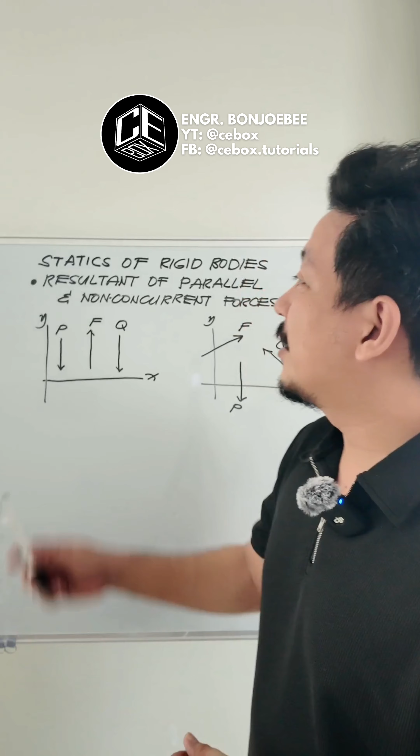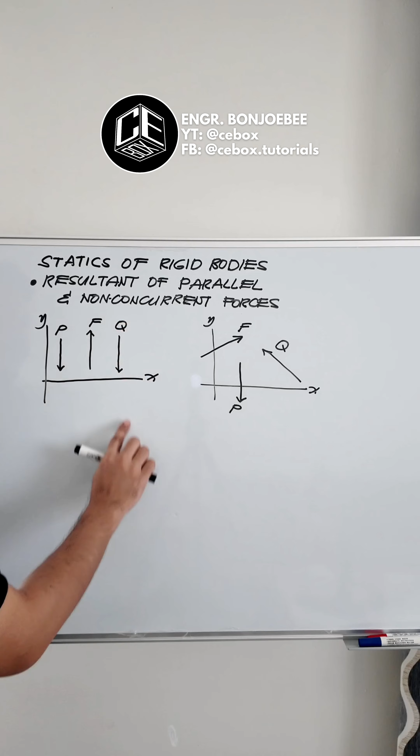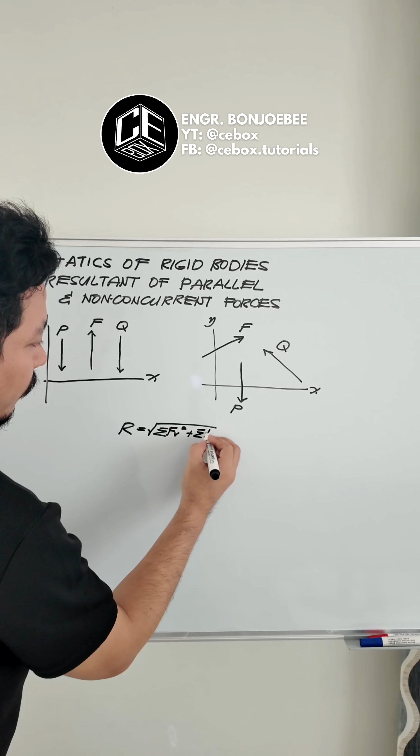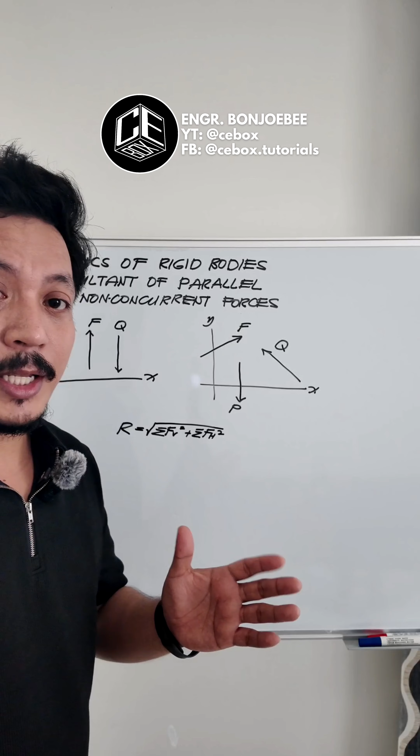Ang resultant natin is R is equivalent to square root of summation of forces vertical squared plus summation of forces horizontal squared. As we can see here in the parallel force system, yung mga forces natin ay pare-parehas na vertical at wala tayong forces na horizontal. Ibig sabihin, yung ating resultant is walang effects in terms of horizontal forces. Kaya ang mangyayari, yung ating summation of forces horizontal is magiging equivalent to 0. Therefore, under ng parallel force system, ang ating resultant is equivalent to square root of summation of forces vertical squared.

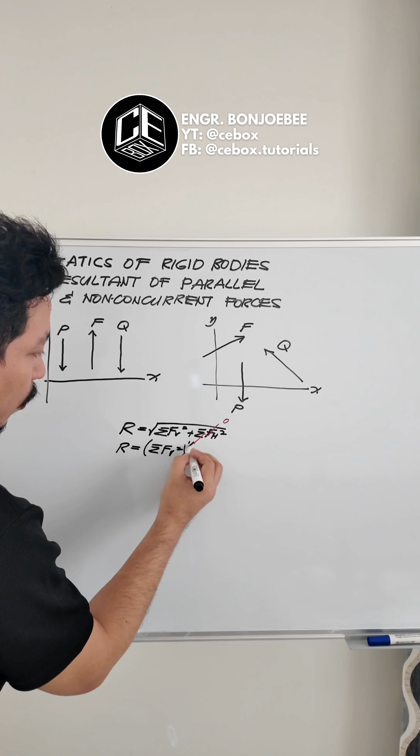At since naka-square root yan, di ba ang square root is what? Raised to 1/2. At 1/2 multiplied by 2 is equivalent to what? 1. Therefore, ang ating resultant under sa parallel force system is equivalent to summation of forces vertical. But, this depends kung ano yung kanyang direction.

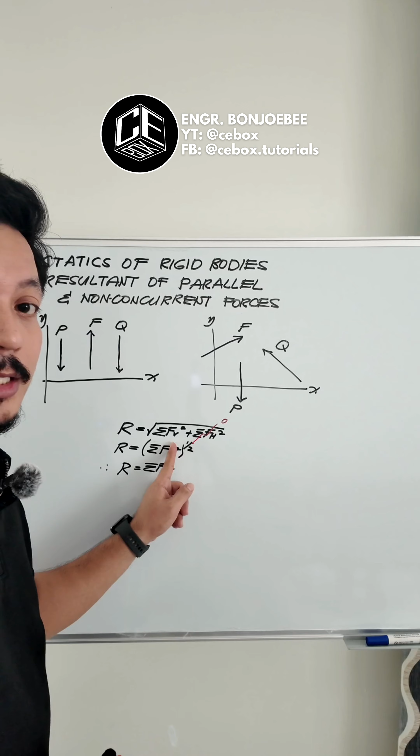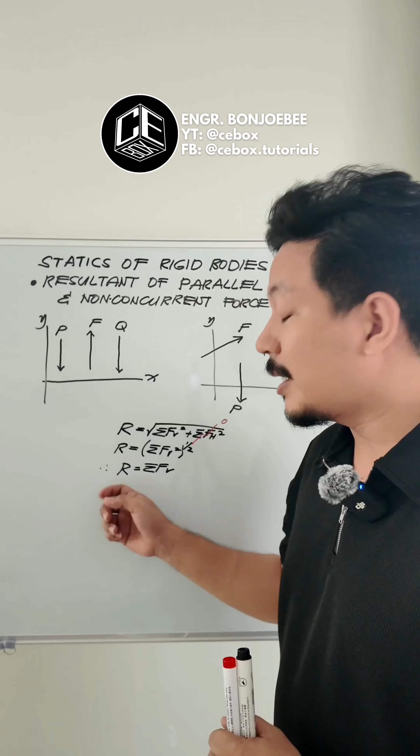For example, yung mga forces naman natin ay lahat horizontal. Tapos mga parallel sila. Ang mag-zero naman nun is yung summation of forces vertical. Kaya, yung ating resultant nun is magiging equivalent to square root of summation of forces horizontal squared. Tapos magka-cancel yung 1/2 and 2. Kaya yung ating resultant in that case is equivalent to summation of forces horizontal. So, take note guys ang ating resultant under ng parallel force system ay nakadepende sa direction ng mga parallel forces.

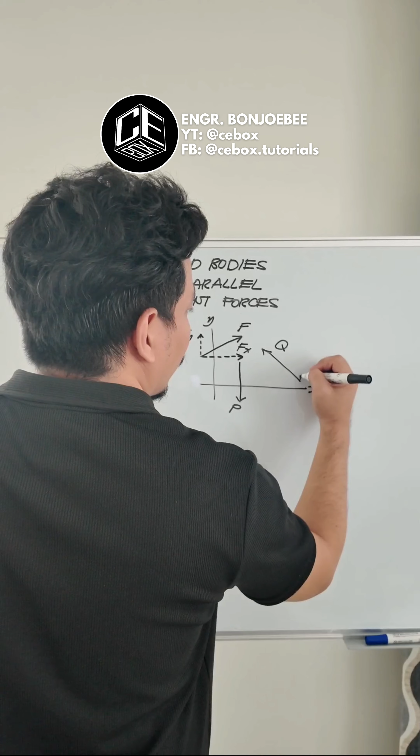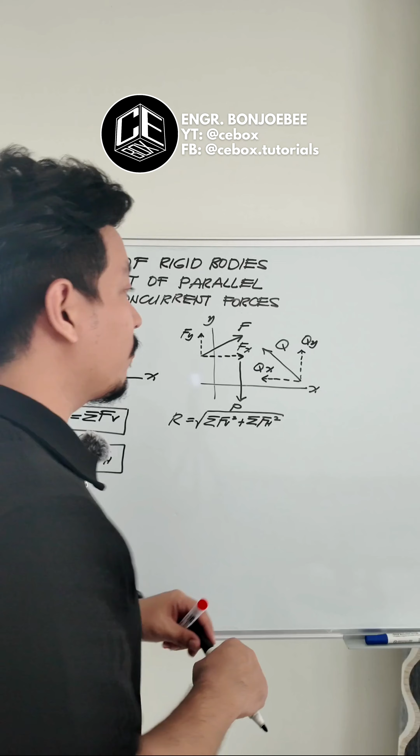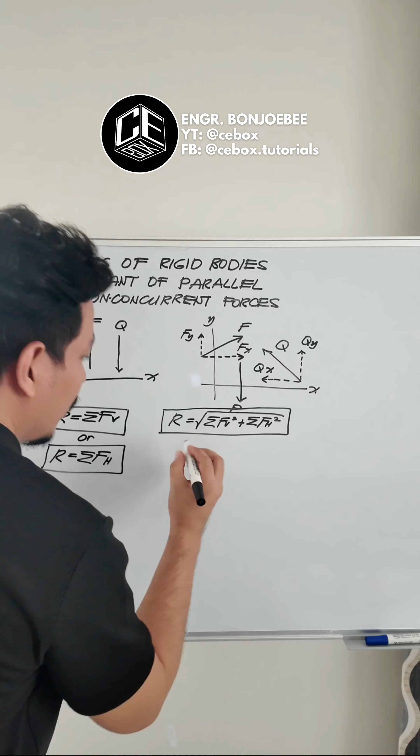R is equivalent to square root of summation of forces vertical squared plus summation of forces horizontal squared. Sir, mag-zero po ba yung ating summation of forces horizontal? Hindi na. Hindi naman siya kagaya ng ating parallel forces na yung mga forces ay lahat naka-vertical. Dito kasi, meron tayong mga forces na vertical and horizontal. Kaya, ito na yung pinaka-equation natin para sa resultant ng non-concurrent force system. So, paano masasolve ang ating R? Siyempre, kailangan natin kunin yung ating summation of forces vertical and horizontal.